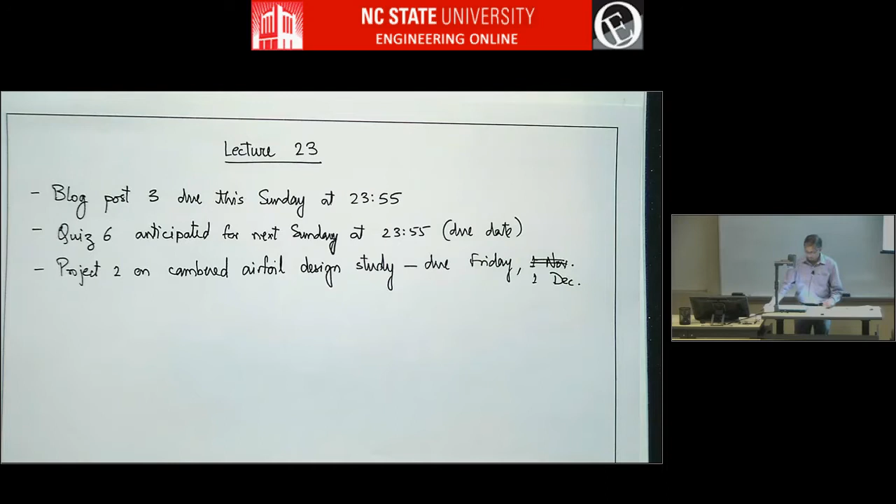Any questions? How was project 1? So it's very open-ended, right? There is no one way to do things or one correct answer, of course. So hopefully that was, and that's how real design is. Even at the end of it, you don't know if you've done it to the maximum possible extent or not. Okay.

Moving on. So in the last class, we were talking about the second elementary flow, which is a source or a sink. And this is radial flow everywhere. And this is the VR and V theta. So we'll continue from there and see what this looks like.

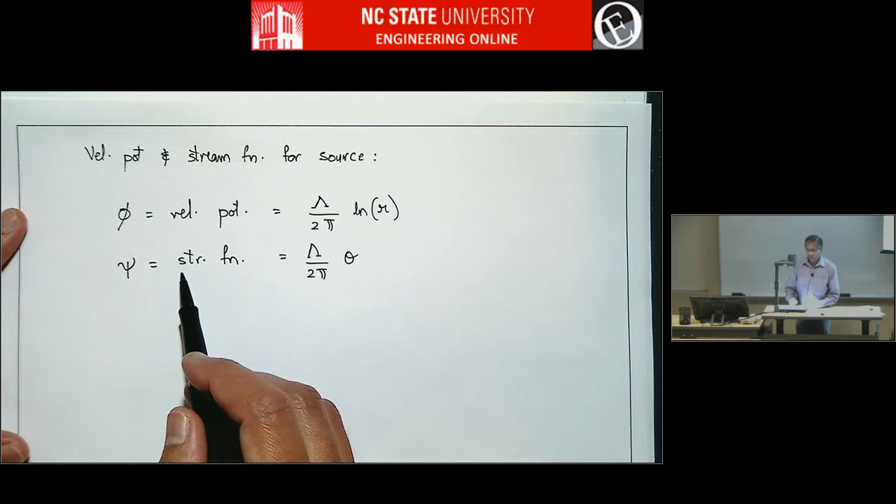And then we'll start adding some flows very soon. So strength, so velocity potential. Phi is velocity potential, and that is lambda over 2 pi natural logarithm of r, and psi equals stream function is lambda over 2 pi times theta. So you can see constant theta will be a radial line, and that's the stream function, or that will be a streamline, and constant r will be a circular contour, and that will be a constant velocity potential line.

And it turns out that volume flow rate out of the source, this will be per unit distance in Z, is simply lambda. So the source strength has got a physical significance.

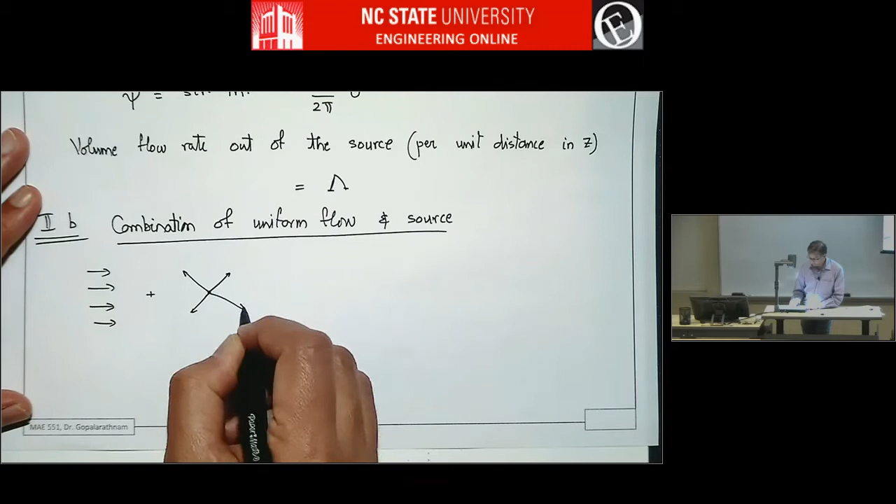Okay, so now we are going to combine the two flows that we have talked about, uniform flow and source. So flow 2B, number 2B is combination of uniform flow and source. So we have uniform flow as one elementary flow, and to that we are adding source, and we get a flow like this. Here's the source. If you just add the stream function due to uniform flow and source and draw constant values of the stream function, which will be streamlines, you get a flow like this.

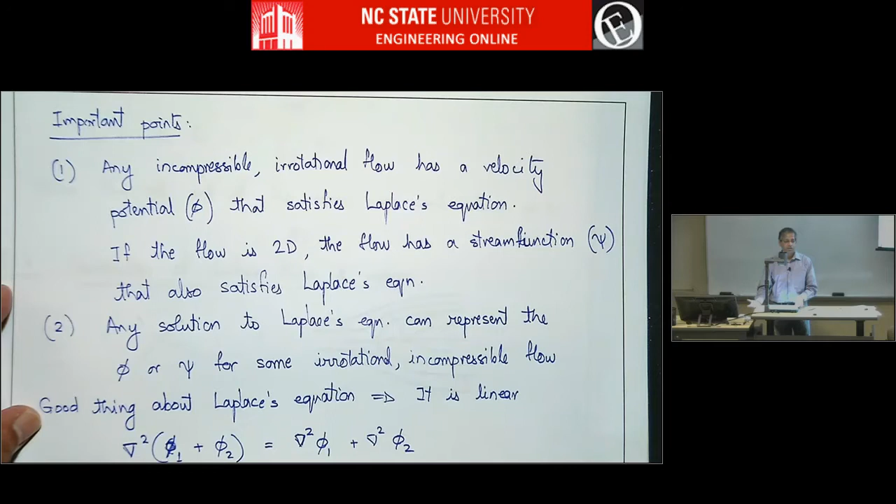Now remember, we talked about, last class we talked about two important points, right? Number 2 was any solution to Laplace's equation can represent the phi or psi for some irrotational incompressible flow. So we're going to draw on that and say the wall boundary condition is met by every streamline, right? Every streamline satisfies the same boundary conditions that are needed for a wall. So you can actually take this streamline and consider that as a wall and replace this as a solid body.

So this outside flow represents the flow past some kind of a parabolic nose body of infinite extent, it goes to infinity in the rear, but the nose of it is like a parabola or some sort of an elliptical shaped leading edge, let's say. So this represents the flow past a body like this. So one way to think about it sometimes is to say, if you want to focus on the leading edge flow of a symmetric airfoil, and if you zoom in and try to look at what the flow there looks like, this could be one possible model for that.

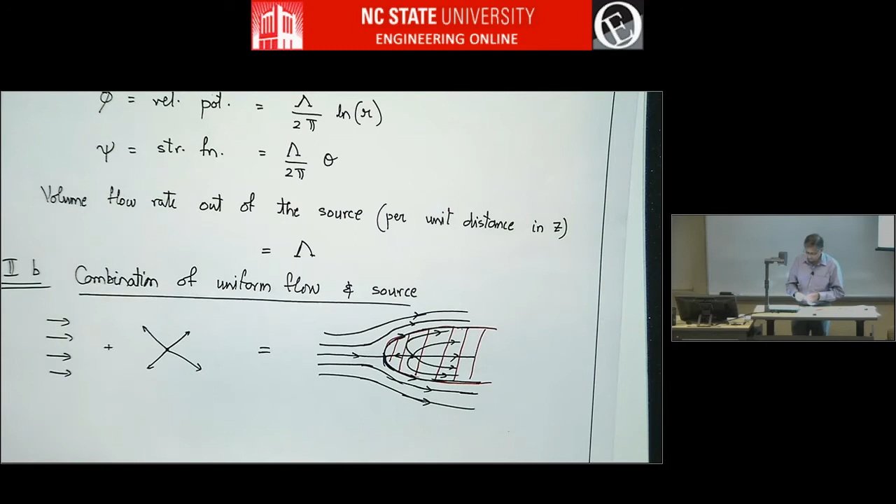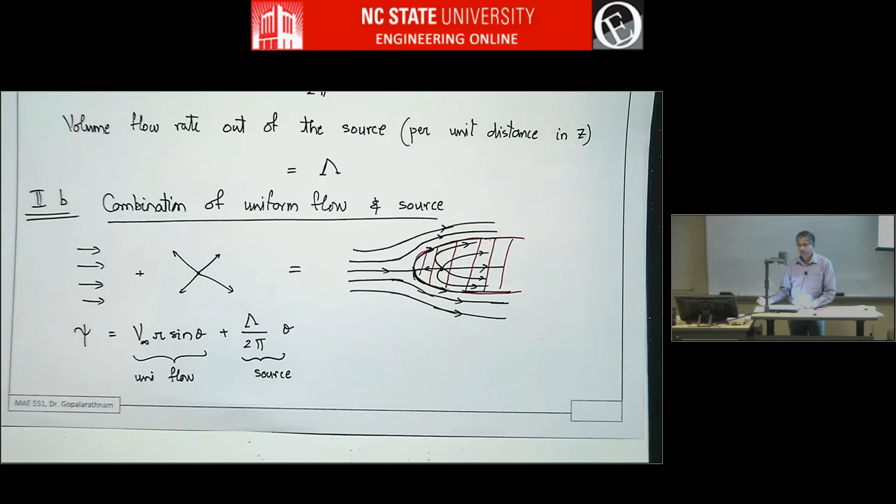So the stream function is V infinity r sine theta. So I'm converting, I believe this is y. V infinity y is the stream function for a uniform flow. Yeah, when we looked at it last time, stream function is u times y, right? If there is only a horizontal flow u, so that's u infinity y, and y in polar coordinates is r sine theta, plus lambda over 2 pi theta. So this is the uniform flow, and this is the source term. So we are adding up stream functions of two flows here because they both satisfy Laplace's equation, and that allows you to do such things.

Okay, let's do one more combination. Combination of source and another source.

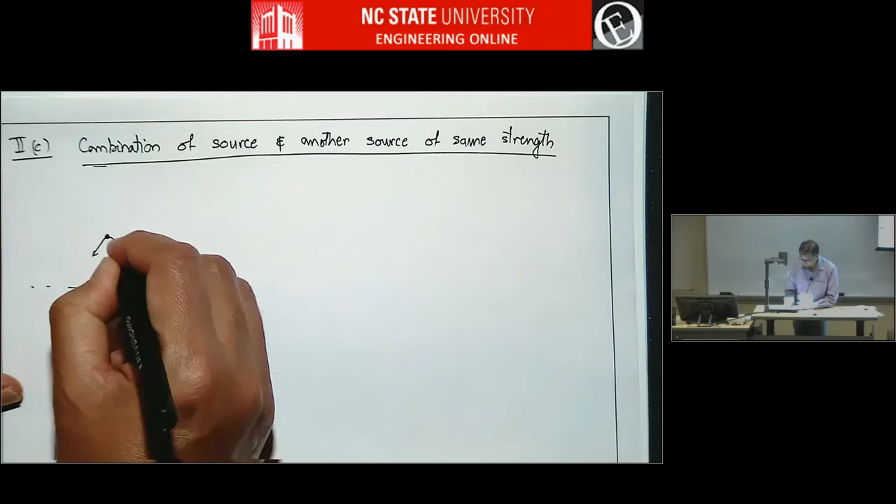So here we'll put a source here, and we'll put another source here. We'll add these two flows up. Any quick guesses on what we'll get? Yeah, this will actually become a streamline. So you'll have a streamline like this, and this source will create a flow that looks like this.

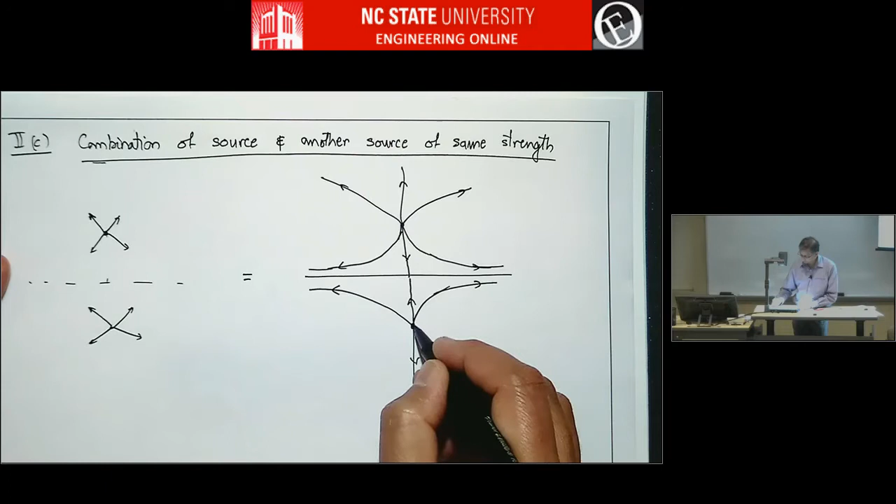One of the things you'll find is that the line bisecting the line joining the two sources, or the perpendicular line in between the two sources, becomes a streamline of the flow. And you can take any streamline and replace it with a wall, and the boundary conditions are satisfied. So you can take this part and convert it to a solid boundary. That means this other part you can convert to some sort of fictitious flow.

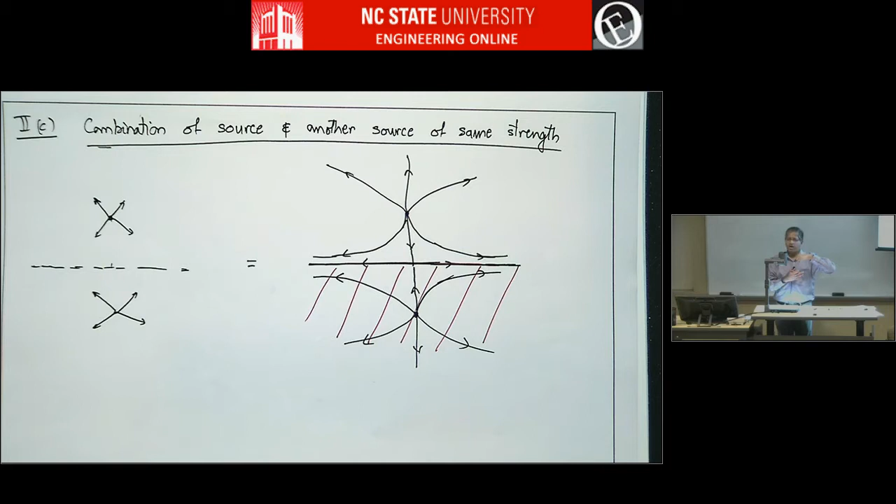So if you want to model the flow due to a source, but not a source in isolation, but a source near a wall, the way to model that is - it's hard to model a wall directly, right? How do you somehow figure out a wall? Instead, you can say a source near a wall is the same as a source with another source on the mirror side of the wall. And that resulting flow, if you discard the bottom half of it, is the flow due to a source near a wall. This general idea is actually really useful in so many places.

So this gives rise to the idea of the concept of a mirror image.

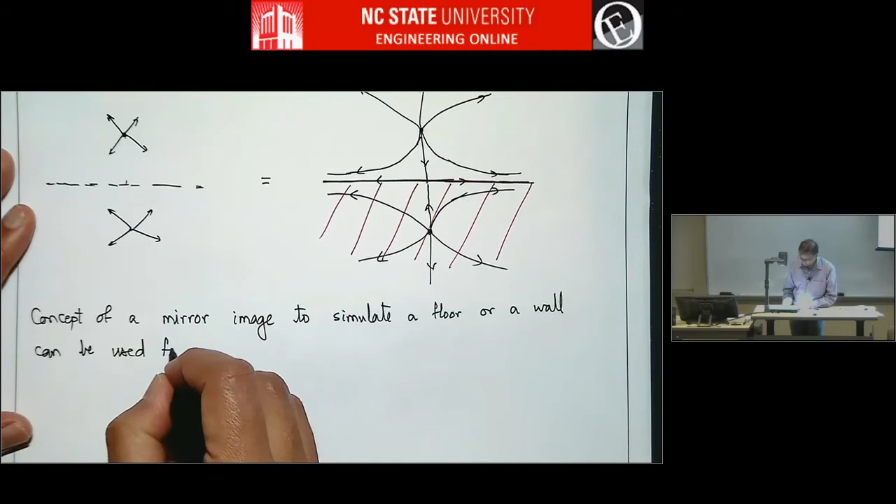Okay, so for example, sometimes airfoils operate very close to the ground. Can you think of an example where that happens? An airfoil that operates close to the ground. What's that? Takeoff or landing. Even more extreme - yeah, cars. The front wings of cars are actually so close to the ground that the ground plays a big influence. If you don't consider the ground, you're completely off on the aerodynamics.

So you might have a high lift airfoil that's like this. Now, how do you simulate the flow due to an airfoil near the ground? Because you can't ignore the ground, you'll be completely off. So one way to do that is to say, I won't simulate the ground. Instead, I will put a mirror airfoil under the ground. It'll be an exact mirror image like this, and I'll simulate the flow past two airfoils that look like this.

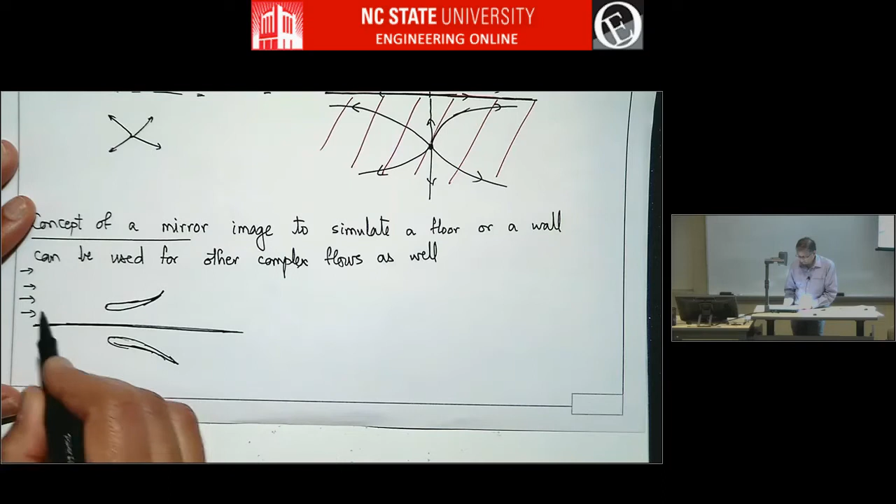In fact, you can do this even in wind tunnel testing. For some reason, if you want to simulate the flow for an airfoil near the floor, you can put it near the floor in a wind tunnel. But maybe for some unknown reason, if you don't want to do that, you could actually put two airfoils in mirror image formation, and the flow past the top airfoil is the flow past the wing or the airfoil near the ground. You can even do this all the way for an airplane.

So if you want to simulate an airplane in takeoff or landing, let's say you have an airplane like this. To simulate that, you can instead put a mirror image and do the analysis past two airplane bodies, and the top one will be the solution for the airplane near the ground.

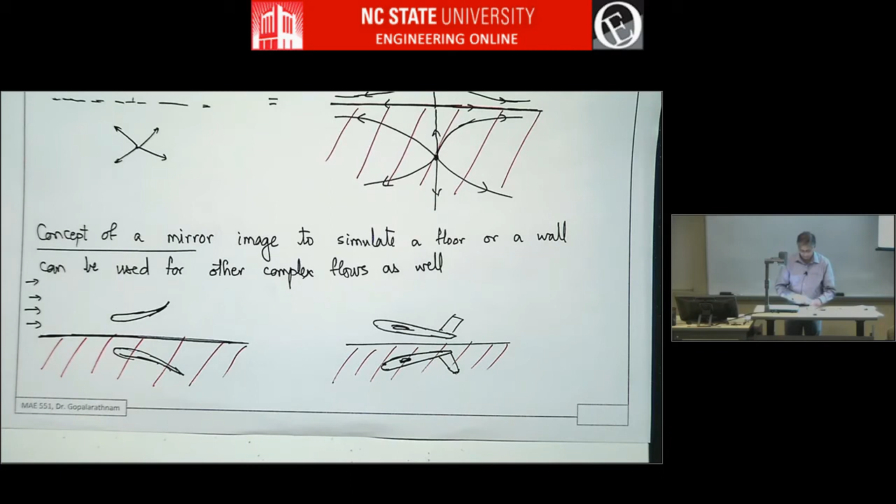Okay, let's do source plus sink. So you have a source and a sink placed close to each other, and the resulting flow will be - can you think of what it will look like? Not yet. Not quite an oval yet, or we're getting to that. But this will look more like a magnetic field due to a bar magnet. Yeah, it'll look like something like that. Maybe not perfectly like that, but it'll be similar.

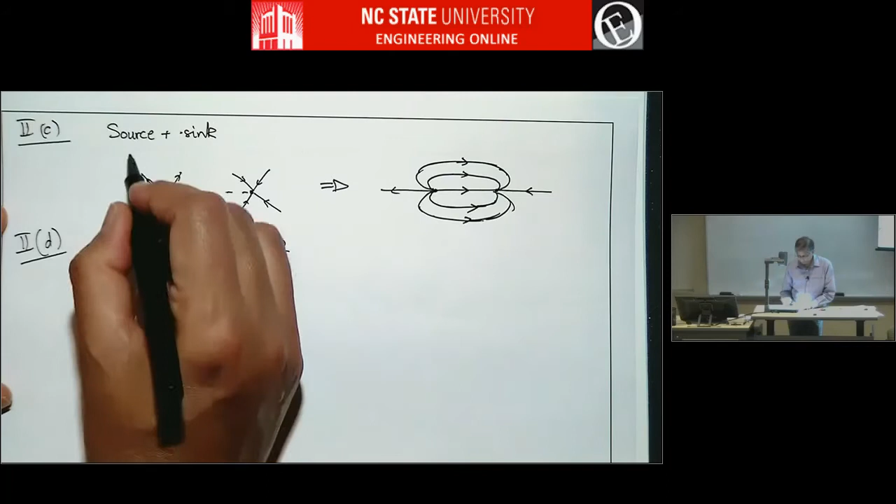Now we add free stream. So to this we add a free stream. There's a source, and there's a sink. And what does this give? Now it will give an oval, right?

So this doesn't tell us that this is flow past an oval. This is only saying these are the streamlines. What you then say is, I can take any streamline, especially a closed streamline, and it makes sense to make it a solid wall. That means if you take this streamline as the solid wall, you can ignore the flow inside. There's nothing wrong with the flow inside, except that we're ignoring it and saying, hey, this is the flow past this oval shape.

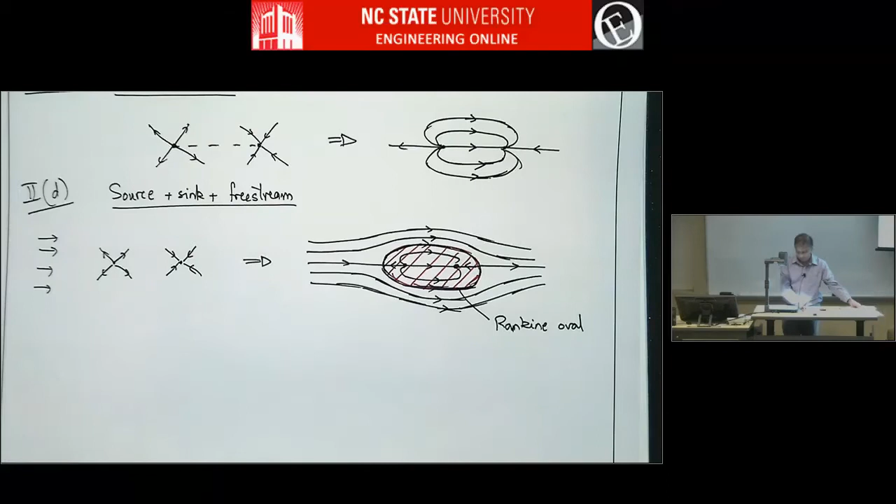Now we'll go to the third kind of flow, which is a doublet. Here we take a source and a sink.

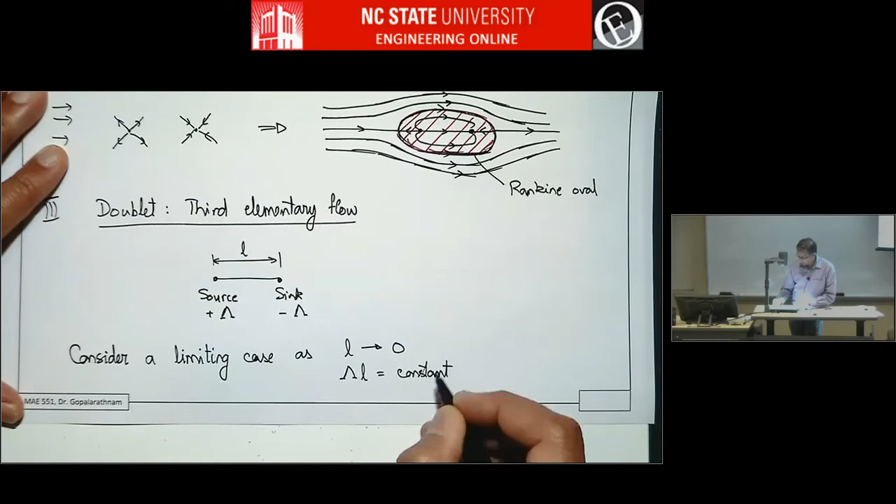And let's consider them at some distance L. But we are going to consider a limiting case, so we are going to bring these close to each other. So, limit as L goes towards 0, but in the process we want to keep lambda times L equal to a constant. So it's not like you bring them on top of each other and the source cancels the sink. It's more like you bring them closer and closer to each other while maintaining lambda L constant. And this constant is related to the doublet strength.

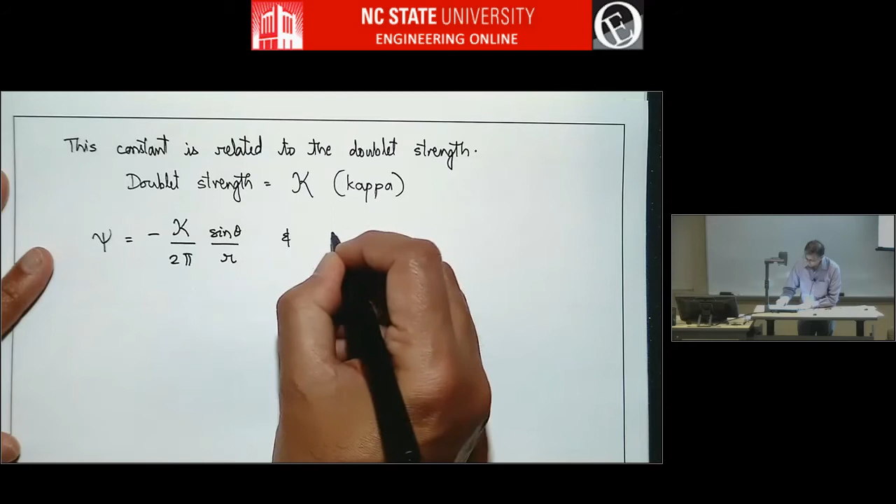So doublet strength is denoted by kappa. And the stream function due to a doublet is minus kappa over 2 pi, sine theta over r. And the velocity potential is kappa over 2 pi, cosine theta over r. So this is the stream function, and this is the velocity potential.

So you can take these functions and plot them in MATLAB or something. Just out of curiosity, go ahead and do it sometime, and you'll see all of these shapes we're talking about. The nice thing is you can add these functions up, make a contour plot in MATLAB. There are some tricks to it because these are singularities, right at the doublet things won't work, but outside everywhere it should work.

So the flow will look like this. Here is a doublet. The doublet has a direction, and so it has magnitude, which we've already seen, and a direction that points from sink to source.

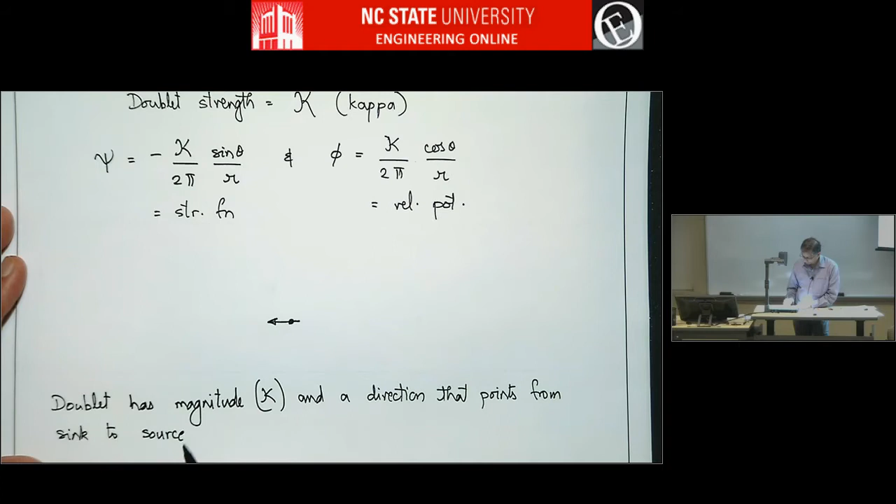So this is the direction of the doublet, and the streamlines—anybody want to guess? Sort of like the source and the sink, but forms a circle. Yeah, so it's like this, right? You're squishing these things and bringing them to one point. So did he say circle? Yeah, so they're going to be perfect circles like this.

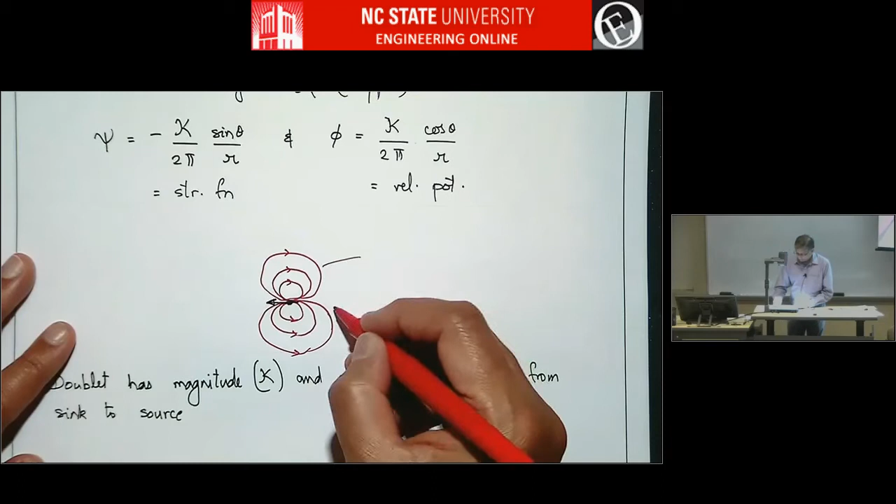Okay, now we'll add a doublet and a uniform flow. This is probably familiar, or should really ring a bell to many of you. So we have uniform flow like this, plus a doublet, which I'm denoting in this manner. What do we get?

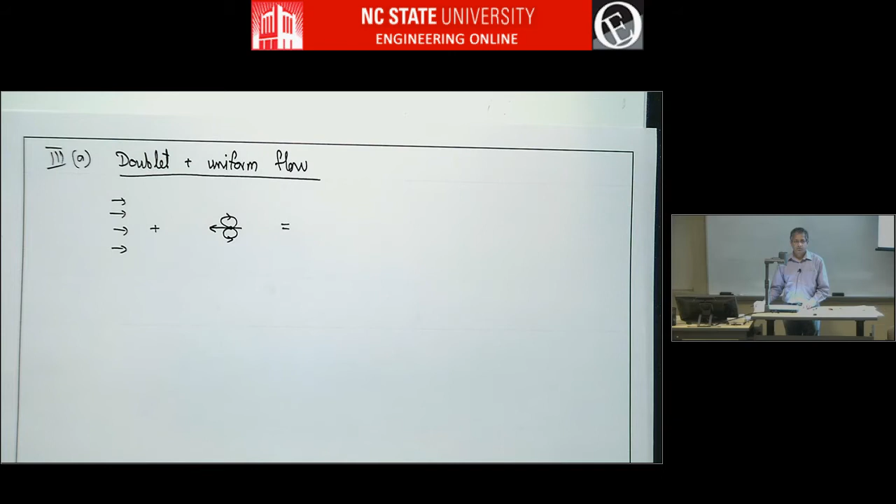Yeah, flow past a circular cylinder. So if you draw these streamlines, you can just add up this stream function, and you'll get: stream function is V infinity r sine theta minus kappa over 2 pi sine theta over r.

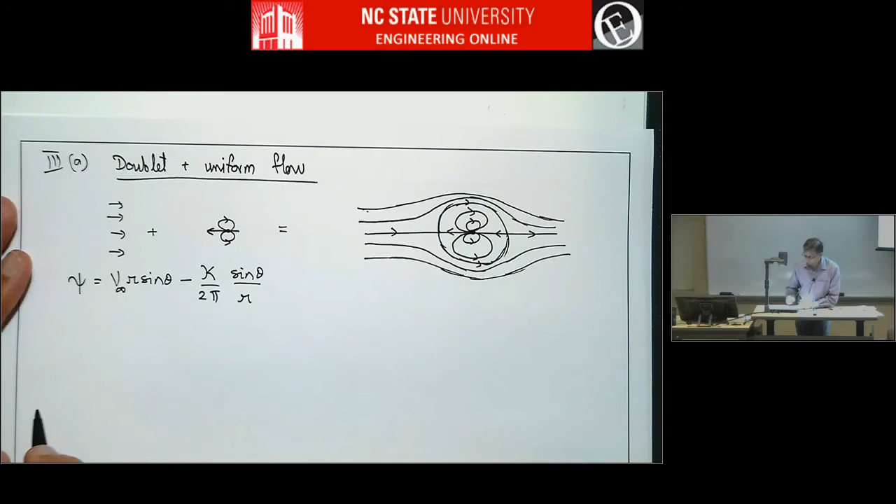So this is the set of contours of constant stream function. These are the streamlines, and as always we can take any contour—especially it makes sense to take a closed contour like this—and say, okay, let me replace that streamline with a solid wall. That means you can ignore the solution of the stream function plot inside this solid wall. It turns out that this is a circular cylinder, or circle shape.

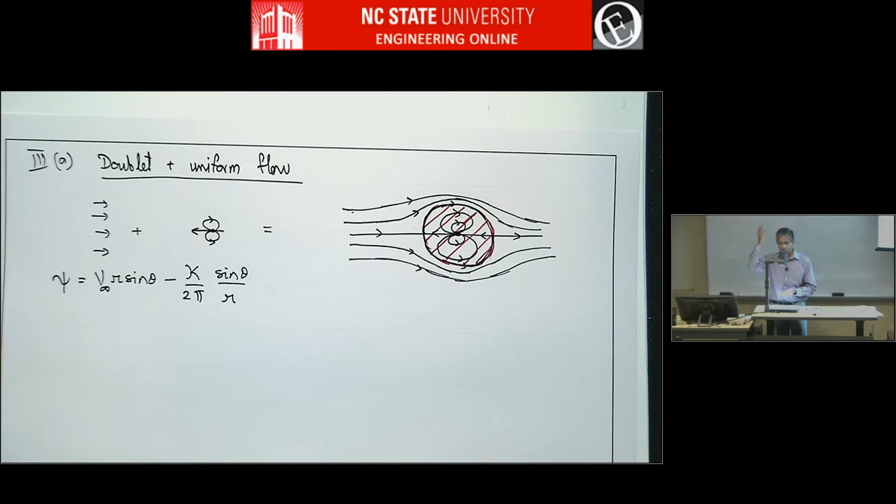So all of the cylinder—because it's a 2D flow, right—it goes to infinity inside the page and outside the page. So this is a cross section. And so this becomes the flow past a circular cylinder. So this is the potential flow.

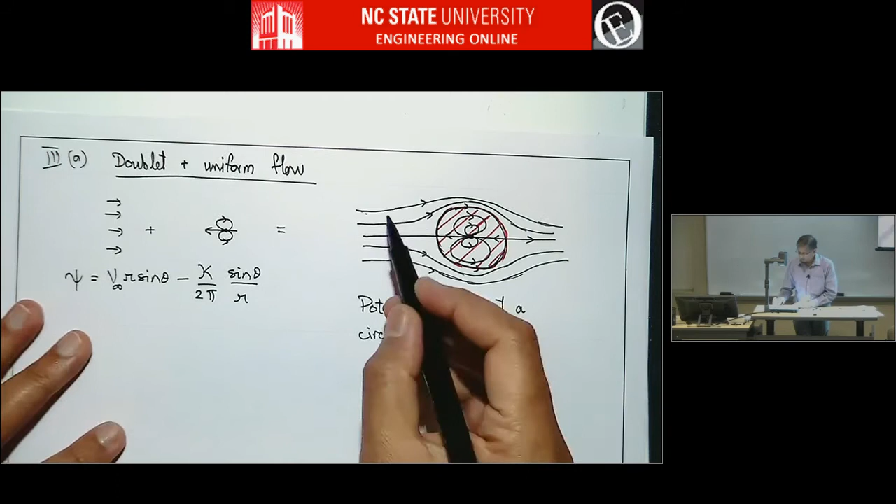And you can do other things too. For example, you could not only replace this as a wall, but even the horizontal surface, right? So if you want to simulate the flow past a bump, like a half semicircular cylinder with a wall, this top flow is the flow past a wall with a semicircular bump, something like that. Or you could say, let me replace one of these streamlines by a wall. So let's see how that looks.

So let me take that picture, and we said this flow is possible, right? You could also say, let me take a streamline like this, and let's replace that with a wall. So suppose you say that.

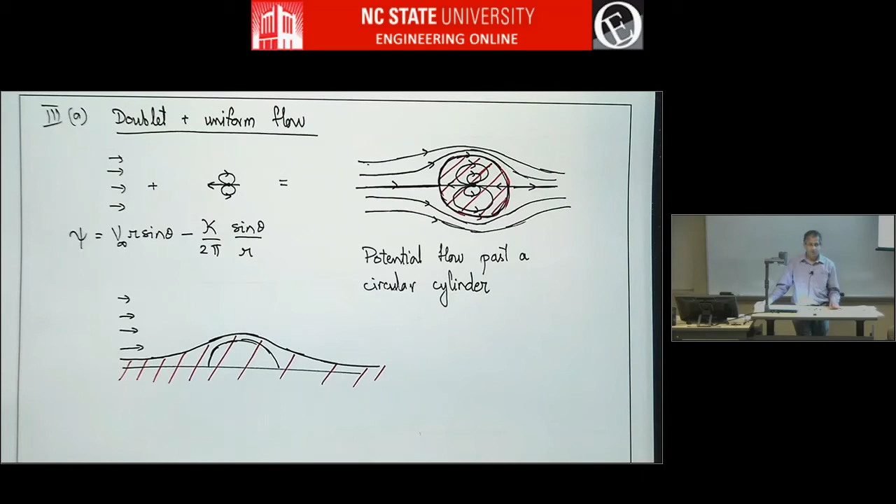This becomes a flow past some kind of a hill. You'll be constrained to this exact shape, but if you wanted to get a flow past a gentle hill, potential flow, this is not real flow, but still it's useful sometimes.

One of the things people have talked about this for is when you go flying sailplanes, people do something called ridge soaring. If you fly a sailplane near a hill on the upwind side, you get a wind pattern like this. So the wind goes up.

So if you fly a sailplane here, the updraft, depending on how big the hill is, will cancel out your glide slope and you'll actually fly level. So without an engine, you can fly level.

And if you have a long hill, if there's a big long mountain range, you can fly for thousands of kilometers along the mountain range without an engine, without losing altitude. People have done that, they've broken records and done all kinds of things.

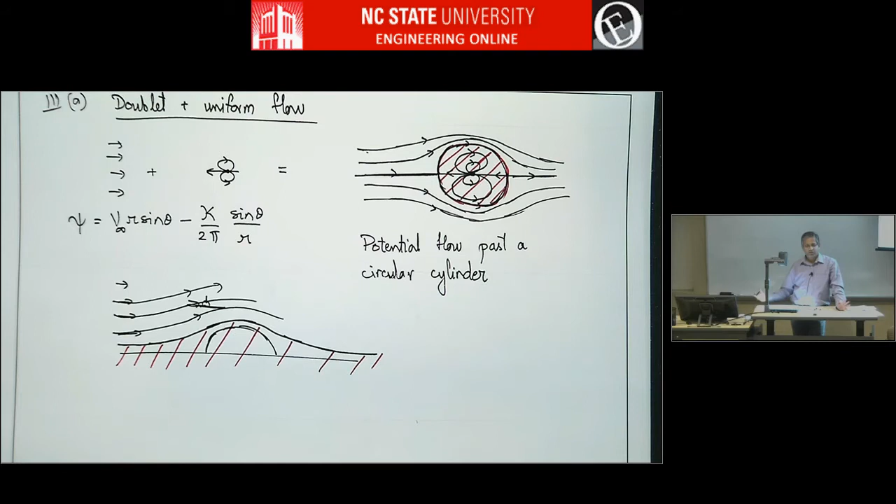So if you want a simple model of flow past some kind of a hill shape, this will give you that. One of the things this tells us is somewhere here is the zone for best updraft.

I guess the point is you can take any streamline, replace it, take that as a solid wall, and that gives you the flow past that wall.

So this is the flow past a cylinder, the solution that we use often. Radius of the cylinder is square root of... and I'm skipping a lot of steps which we do in the undergrad aero class. This is just a review of those concepts, and if you haven't done this in some course, you may want to go and read up the stuff.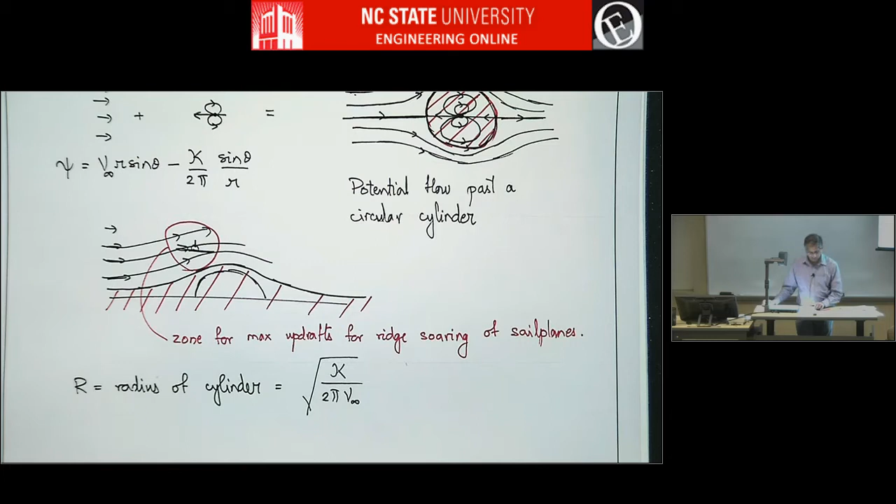The big thing to remember here is this is ideal flow or potential flow. So in potential flow, the cylinder... let's say this is ideal flow, and this is real flow.

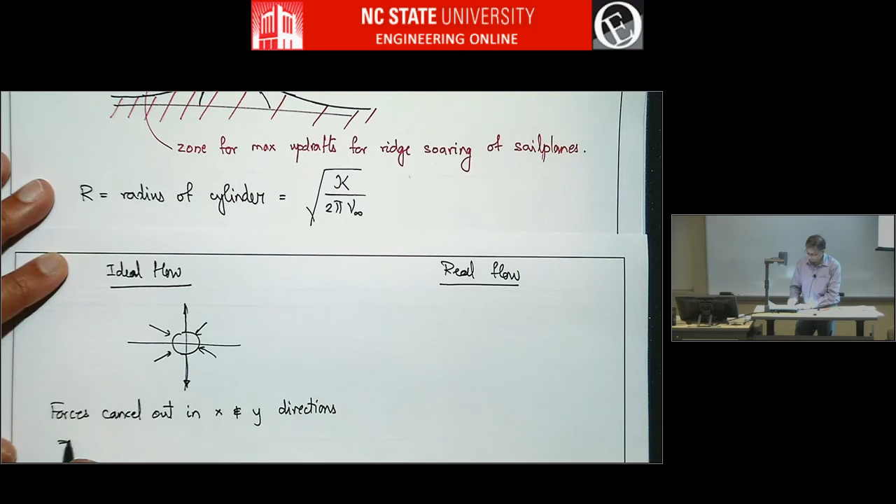You might have suction here. I'm not drawing this correctly, but basically the forces cancel out in x and y directions, which means there is no lift and no drag.

You can see even the flow is pretty symmetric, right? There's left-right symmetry and top-bottom symmetry. So there's going to be equal and opposite pressures everywhere, they'll cancel. But a real flow is not like this, a real flow will have separation.

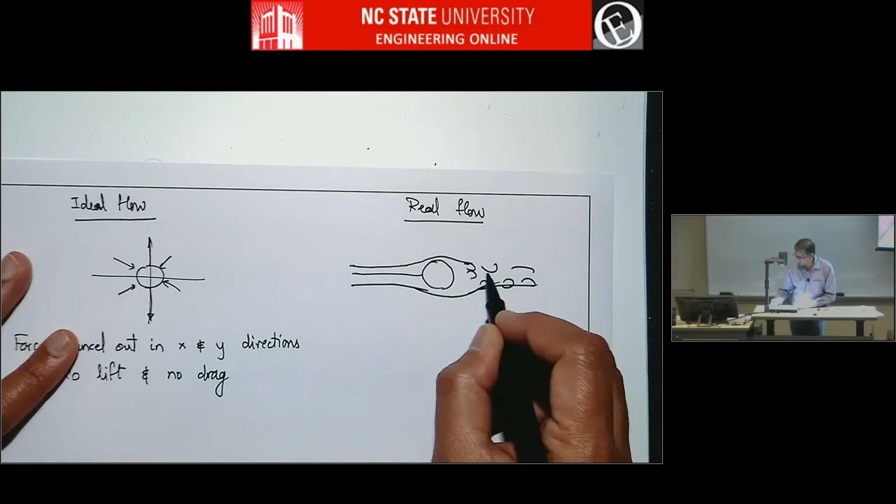Something of this sort, it depends on the Reynolds number. So you might have a wake where there's separated flow. Here lift may be 0, but separated flow results in significant drag.

What kind of drag will that be? Pressure drag. Because you will have positive pressure on the front surface, but lower pressure in the wake, and so there will be pressure drag.

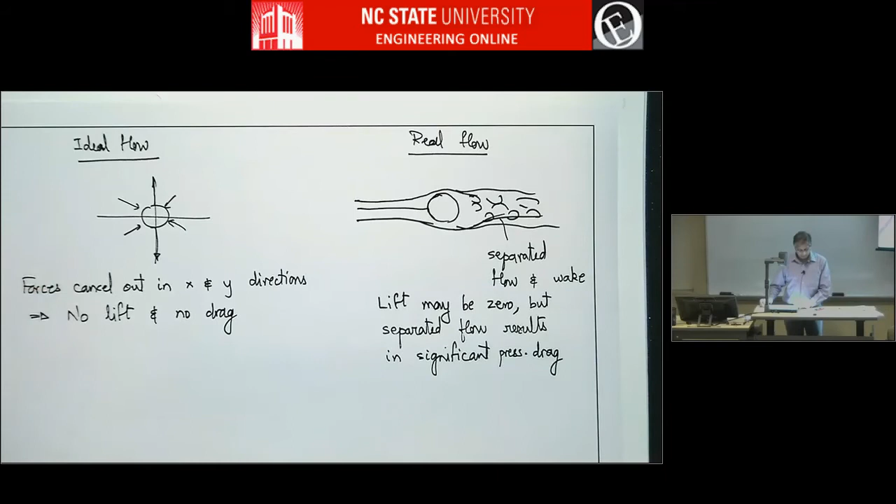And at many Reynolds numbers, there will be vortex shedding. In many cases, you'll have flow behind a cylinder, and many bluff bodies will look like this, with alternate shedding of vortices from the two sides. They'll keep flipping - this will come and then this will happen.

This is called a Kármán vortex street. It's named after Theodore von Kármán, who actually explained and discovered this phenomenon.

I think I put one book as a suggested reading in the syllabus, by Theodore von Kármán - 'Aerodynamics: Selected Topics in the Light of Their Historical Development.' He talks about this, it's very interesting reading. It's not at all heavy math and technical, it's a story basically, and he talks about how he came up with this.

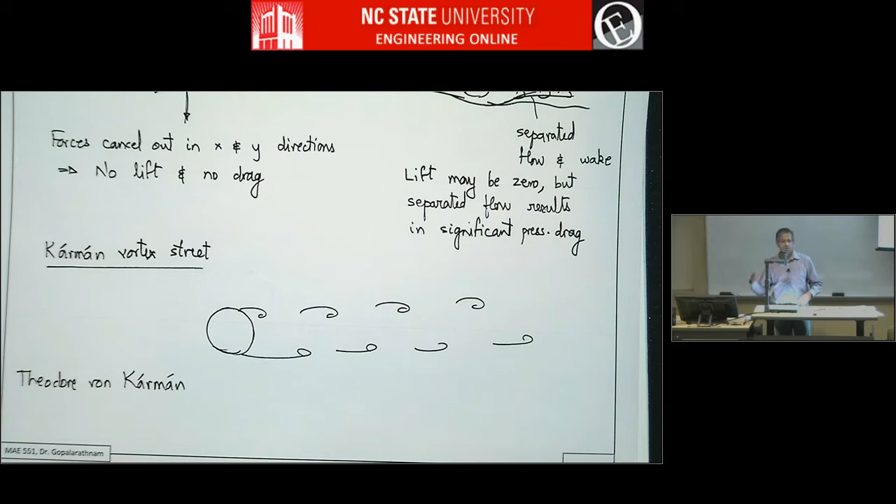This has also got a lot of practical applications, and one of the famous examples is the Tacoma Narrows Bridge, about which there's even a YouTube video. You can see how the bridge, under certain wind conditions, started oscillating so much that it just fell apart.

That's traced to vortex shedding. The other reason to study stuff like this - you can almost ask, what's the point, if the real flow is like this, that's what happens in reality. What's the point in studying flows like this? Maybe mathematicians will find it interesting. Why should we waste our time as engineers on some abstract concept like that?

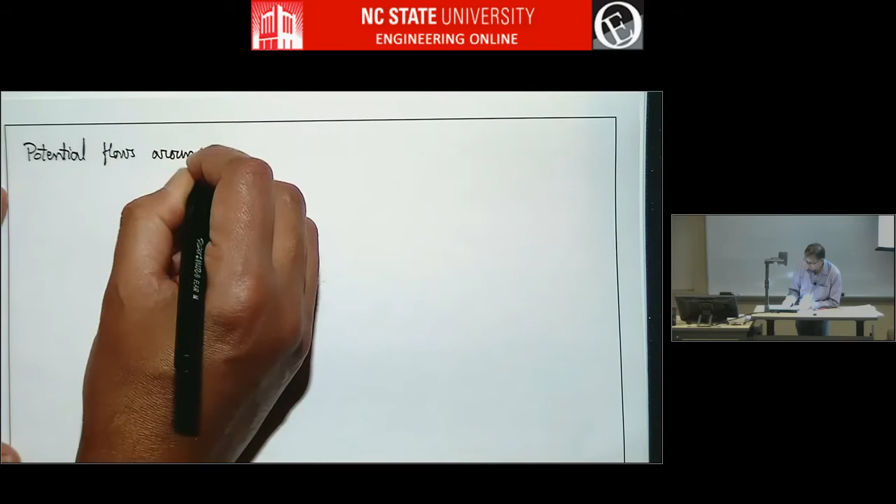One reason is that potential flows around cylinders, circular and even other kinds of cylinders, are useful in conformal mapping.

So in conformal mapping, what you do is you take flow around some kind of a cylinder, which is really well known. We have just written the equation for this. You can just add the stream function due to uniform flow and a doublet, and that's it. You get the streamlines due to flow around a cylinder, right? So you have this. This is potential flow, so it's not real flow.

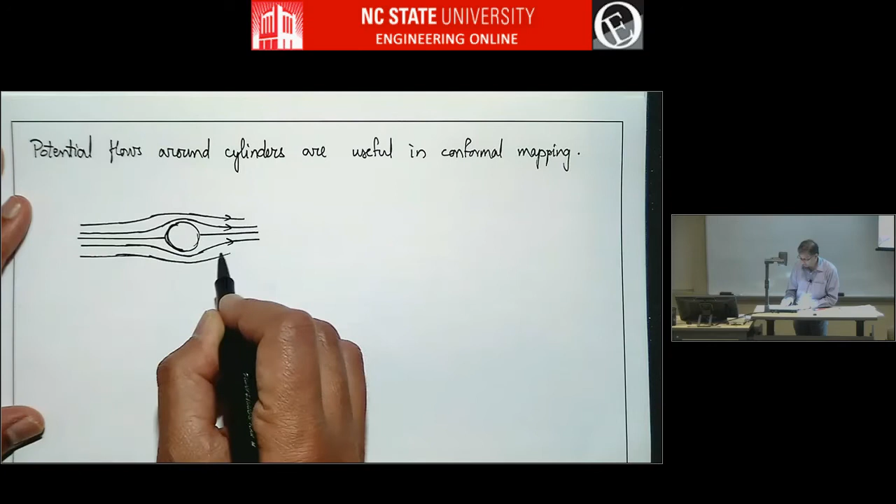And the isopotential lines will look like this. They'll always be perpendicular to the streamlines at every point of intersection.

So there is something called conformal mapping with which you can transform this. And when you transform it, you can transform it to an airfoil shape. And that's just kind of mind-blowing.

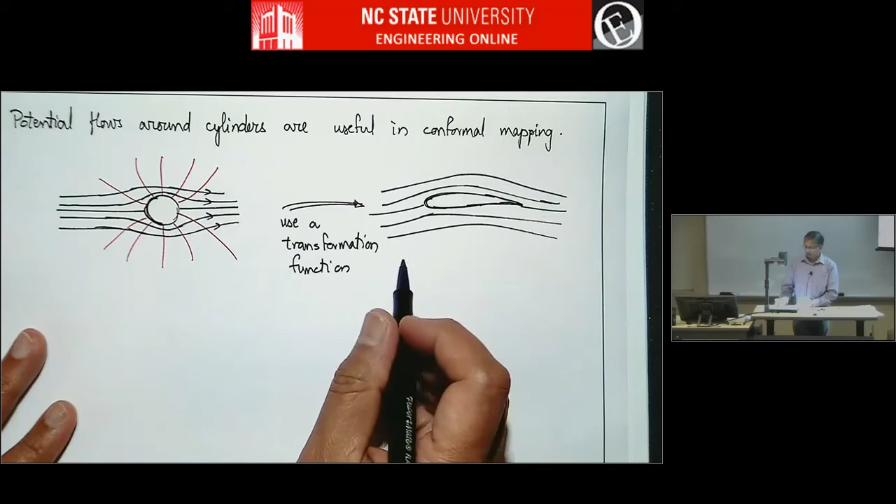So you can convert this flow by using a transformation function using complex variables, and this very well-known flow can be transformed to flow past some really complicated looking airfoil shape like this. Think of it, this is a really weird shape, right? Nothing regular about it. I mean, we are so used to airfoils that we say, okay, that's a nice shape. But if somebody in the very beginning, 200 years back, wanted to calculate flow past this, nobody knew how to do that.

And then they came up with conformal mapping, and we'll be talking a little bit about that in the Joukowsky transformation. I mean, the way the semester is going, I'm very much behind, but hopefully that'll happen.

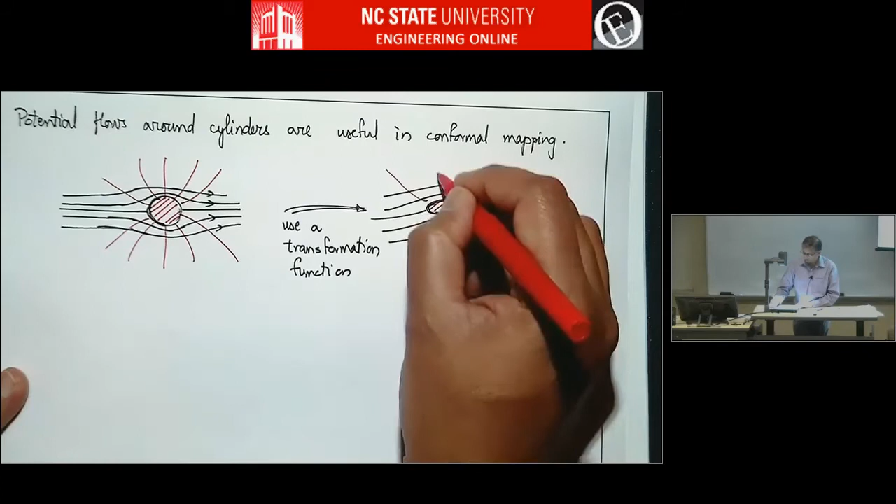So what happens is all of these streamlines get morphed into streamlines like this because of the transformation function, and this geometry gets morphed into this geometry, and the isopotential lines will become something like this. I don't know exactly how they'll look, but maybe something like this. So that's a really good reason to actually study these kind of flows, even though they are very different from real flows.

The reason potential flow past these kind of bodies is useful is why? Okay, at least we can say this potential flow is nothing like reality because there's a big wake. But this potential flow is actually very useful. It's close to reality, but what? Yeah, these are streamlined objects.

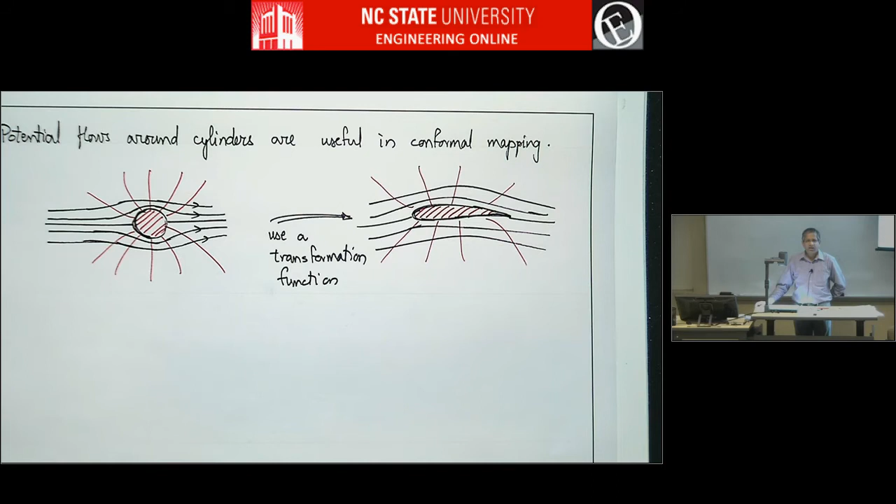For streamlined objects, as long as angle of attack is small, the boundary layer is thin and attached most of the time all the way to the trailing edge. And so the potential flow is actually very close to the real flow. And lift and pitching moment, at least you can get very confidently, even with angle of attack up to 10 degrees or something. It's only drag, of course, potential flow has no drag. So for drag you have to do a boundary layer calculation.

Okay, pressing on. Fourth elementary flow is a vortex.

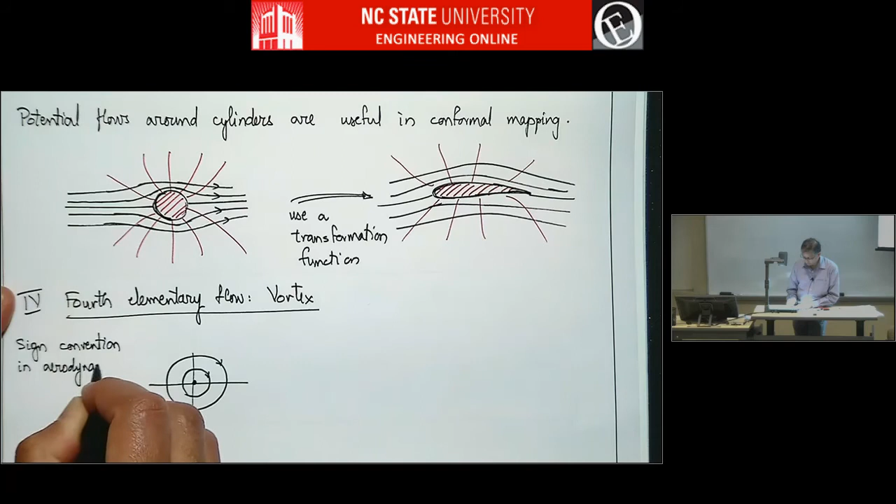So a vortex is a flow where the streamlines are circular, concentric circles. And the sign convention in aerodynamics: a positive vortex results in clockwise flow. And this is kind of counterintuitive because usually theta, in polar coordinates, increases this way, right? But this is somehow the way things are, at least in modern books like Anderson's books.

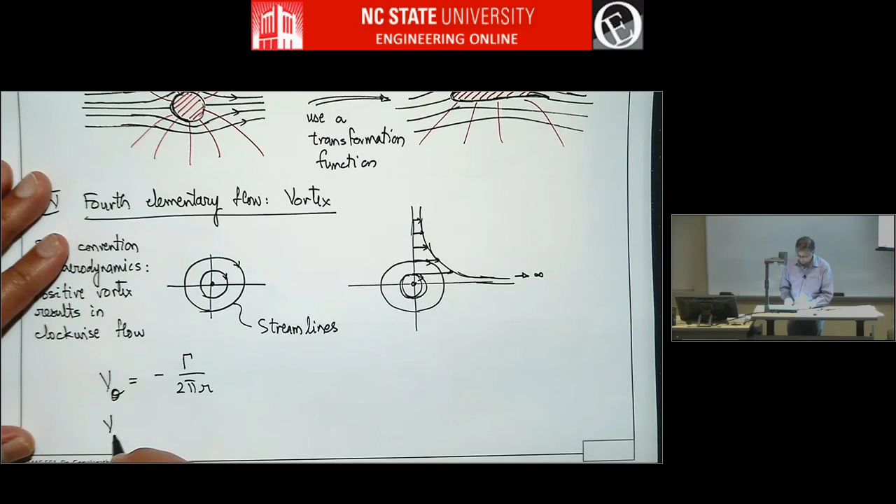So the velocity variation - there's only tangential velocity and that varies in a certain way. So as you go up in y or in r, velocity decreases. And as you come closer and closer to the vortex, velocity becomes very high and actually goes to infinity. So in other words, these are the streamlines. So v theta equals minus gamma over 2 pi r, and Vr equals 0. So there is no radial velocity.

So the strength of the vortex is denoted by gamma, which is capital gamma.

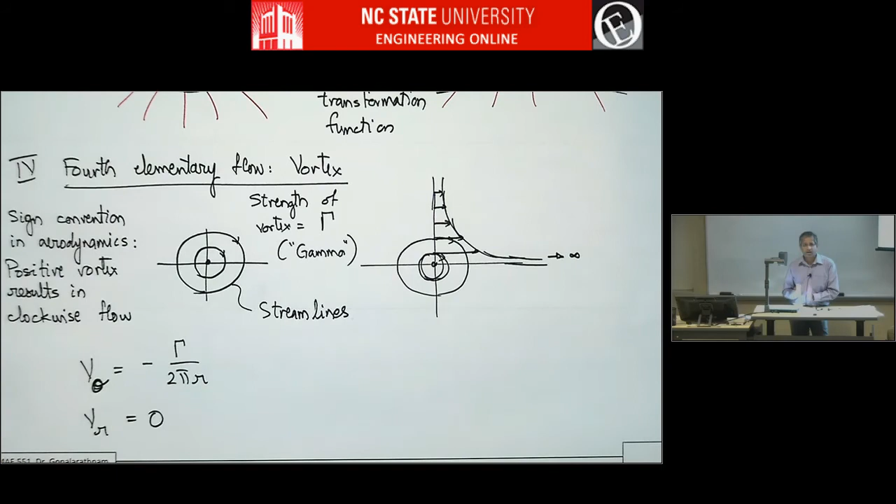How do you think the isopotential lines will look for a vortex? Yeah, it'll be radial, because everywhere isopotential lines have to intersect streamlines in a perpendicular fashion, right? So these are isopotential lines. So velocity potential is given by minus gamma over 2 pi times theta, and the stream function is given by gamma over 2 pi natural logarithm of r.

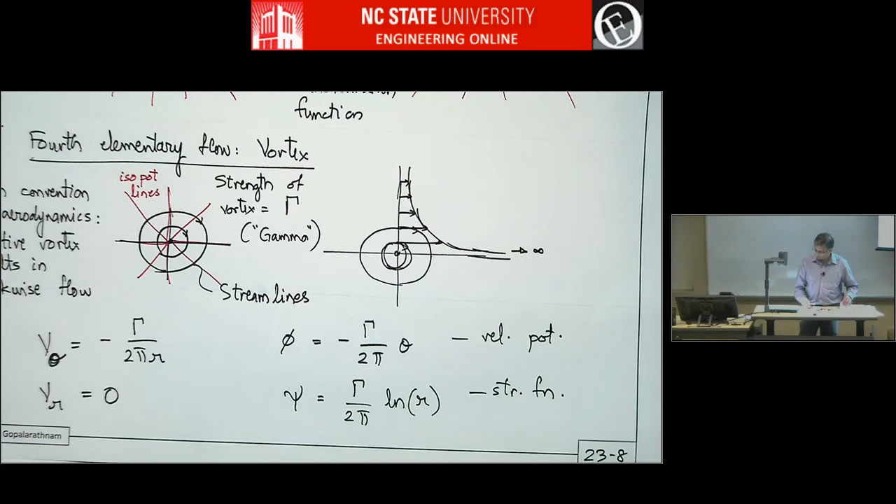And in a vortex, curl of V - remember curl V has to be 0 for irrotational flow, right? Potential flow is irrotational, incompressible. So curl V is 0 everywhere except at the vortex point, and usually you put that at the origin. So except at the vortex point, this vortex point is a singularity. Just like in a source, conservation of mass works everywhere except at the source, right? So that point is a singularity. Like that, a vortex is also a singularity, and here curl V will not be 0. Everywhere else it will be 0.

Okay, so this actually brings us to the concept of circulation.

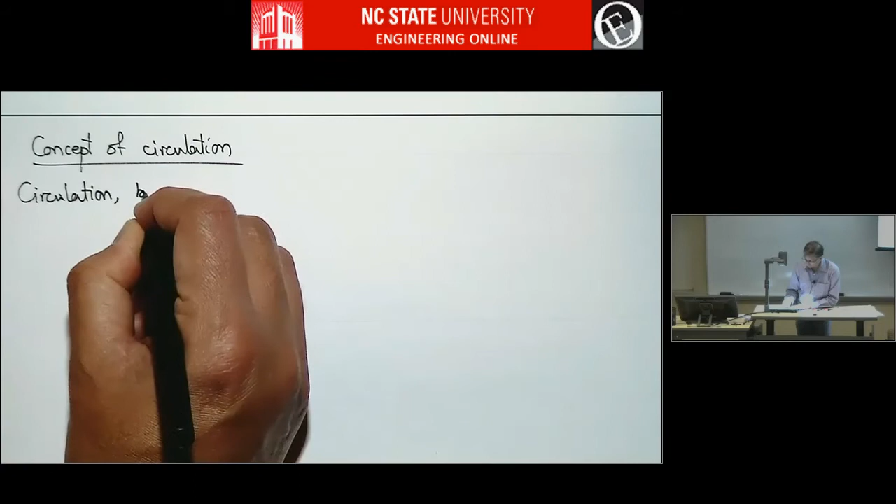So circulation is the line integral. By definition, it's the line integral of the velocity field around a closed contour. This is a definition, so we just take it as they have defined it. In mathematical terms, this is integral v dot dl around a closed contour.

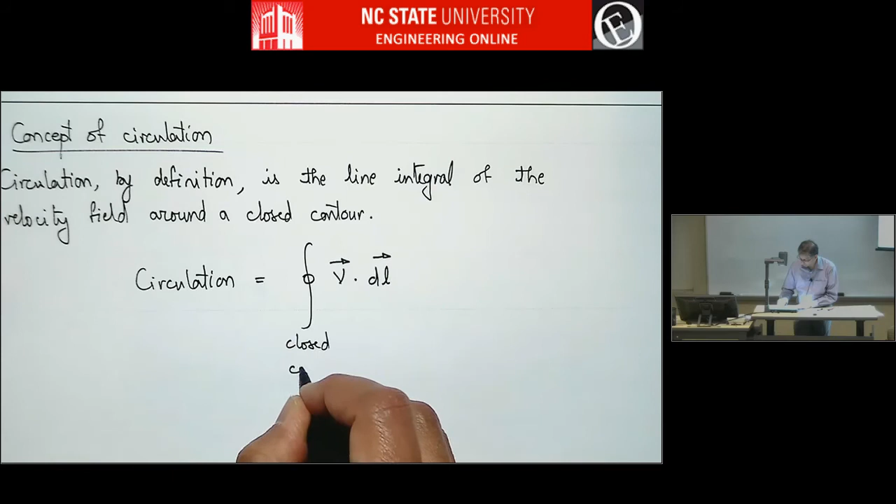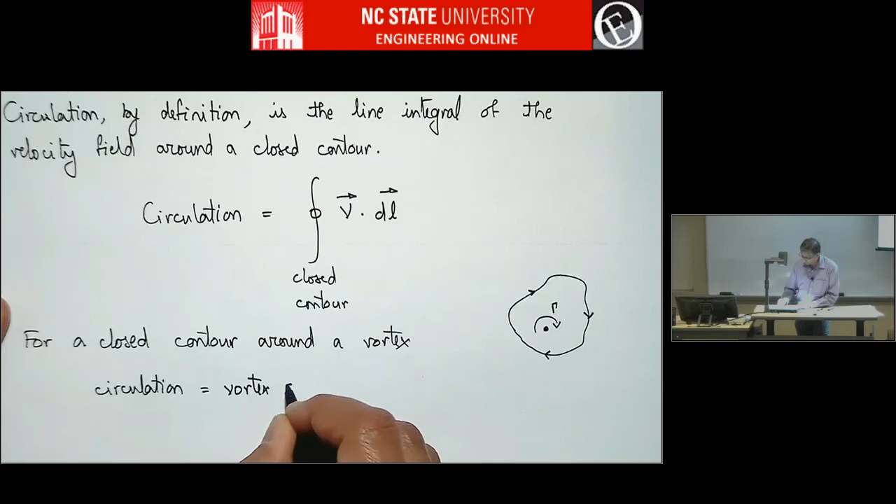So for a closed contour around a vortex, let's say you have a vortex here of strength gamma, and you make a contour like this. Let's say you go in the clockwise direction. What do you think you'll get for circulation? It'll be equal to the vortex strength. So the circulation is equal to the vortex strength, and that's equal to gamma.

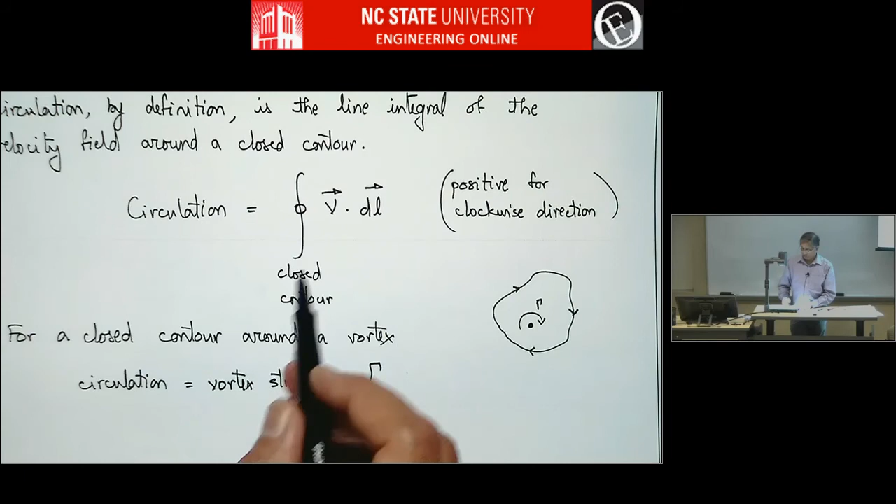I should mention that circulation is positive for clockwise direction. That means you do the line integral in the clockwise direction. Again, this is opposite to what you do in math, where you do positive polar coordinates, which is counterclockwise. So because circulation, which is a completely mathematical definition, is integral v dot dl around a closed contour, that turns out to be equal to vortex strength. So gamma is also the symbol that's used for circulation.

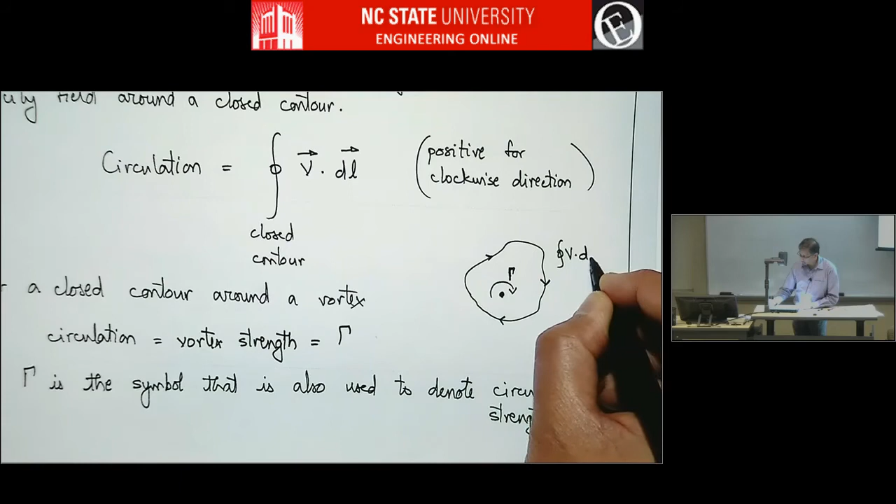So the circulation strength is denoted by the symbol gamma, same symbol used for a vortex. Some nice consequences or connections between circulation and vortex strength: if you take a contour around a single vortex of strength gamma, integral v dot dl equals gamma. If you have a bunch of vortices, say gamma 1, gamma 2, and gamma 3, and you take a contour around these three vortices, then integral v dot dl around this contour will just be the sum of these vortices, gamma 1 plus gamma 2 plus gamma 3. That just comes from the math working out that way.

We are very soon going to connect all this with airfoil flows. Now we'll go and add to the cylinder flow we got earlier, and we'll put a vortex on top of that. So this will become lifting flow past a circular cylinder. Here you have uniform flow plus a doublet, which we had earlier, plus now we'll add a vortex at the same place where the doublet is, and we'll get lifting flow past a circular cylinder.

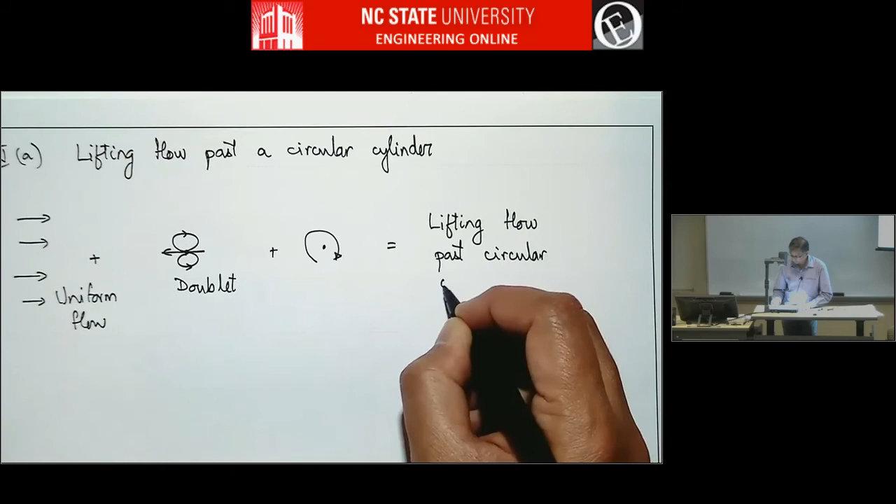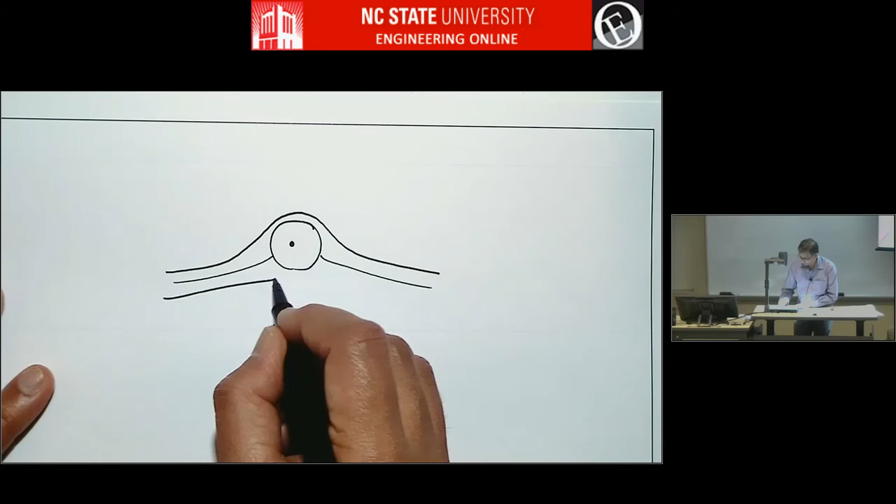So let's say we put the doublet here and the vortex here. You will get a flow whose streamlines are like... let me use a new page. So we have V infinity far away, and this point has a doublet and a vortex, and then you get some flow inside too. If you draw the streamlines inside, I think it'll be something like this. But essentially you're saying this cylinder is a streamline. The circle is a streamline, so you can replace the circle with a wall, and that means the outside flow is the flow past a circular cylinder, but a flow that generates lift because of the asymmetry in the flow.

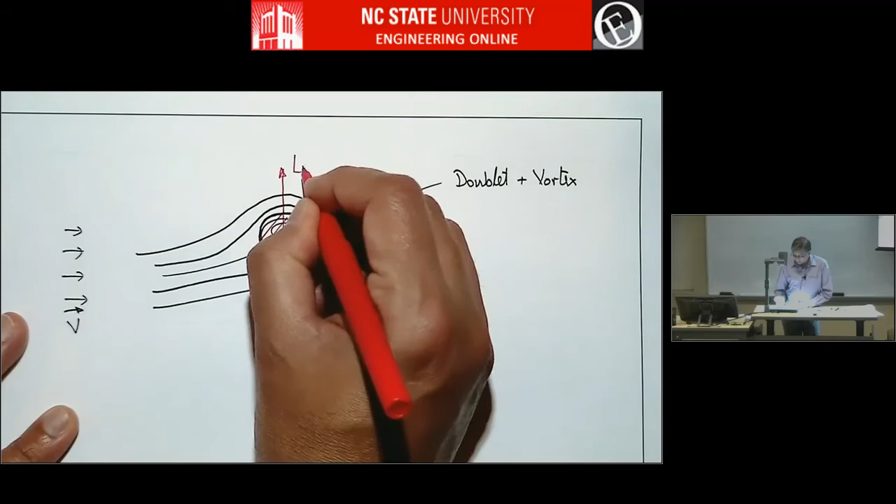So now you have a cylinder that's generating lift. How you get this in practical life is maybe of secondary importance. It turns out if you put a cylinder in a wind tunnel and spin it, you will get lift. But that's not exactly the same kind of flow as this - that comes due to viscous effects, because if the cylinder is spinning, the surface friction will also cause the flow to go faster on the upper surface than on the lower surface, kind of like this. So that comes due to viscous effects, whereas this is completely potential flow. But the same general idea is what happens when you spin a cylinder in a real flow, like in a wind tunnel or water tunnel. So this has got non-zero lift, but zero drag.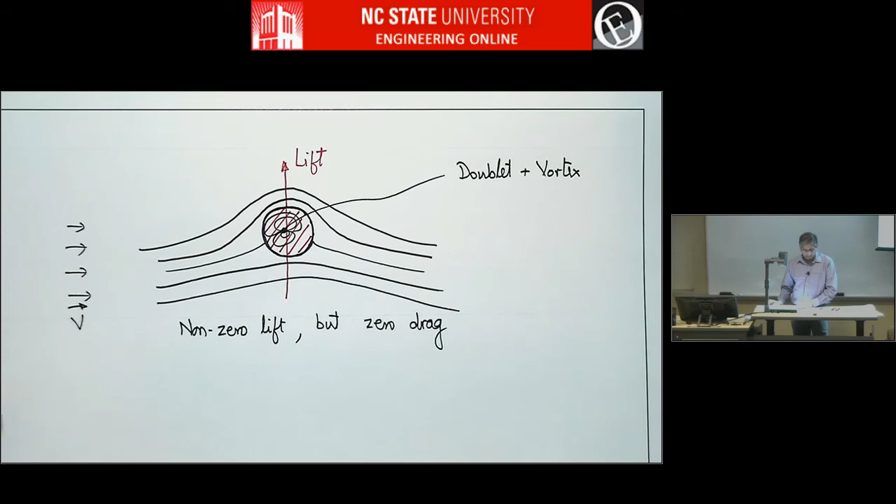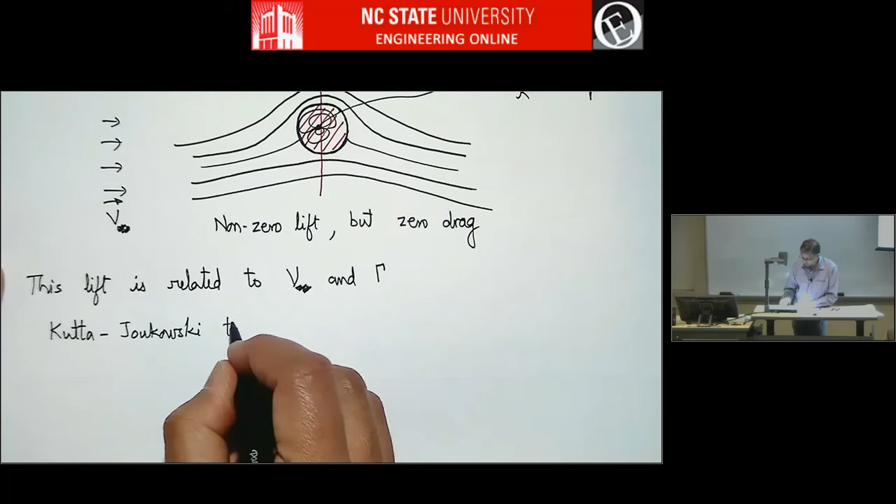The doublet strength is kappa and the vortex strength is gamma. Doublet strength controls the radius of the cylinder, and gamma, the circulation or vortex strength, controls the lift. Without going into too much derivation, this lift we generate is related to V infinity, the free stream speed, and gamma. Let's just call it V for now. Lift is related to V and gamma, and there's a theorem that connects all this, called the Kutta-Joukowski theorem, which states that lift per unit span is rho V cross gamma. This V is the uniform velocity and gamma is the vortex strength. If you take those as vectors, V is in this direction, gamma is into the page, and V cross gamma gives you lift in this direction. This is lift per unit span - again, we are talking about 2D flows.

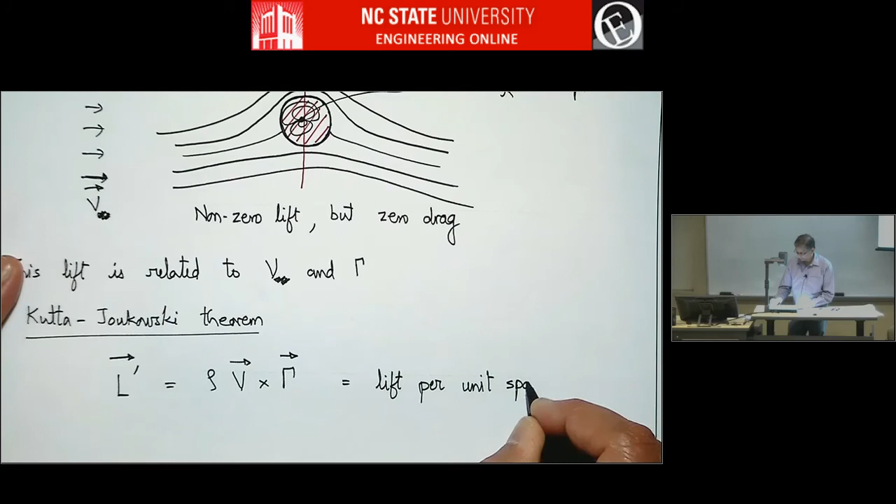So we see that L prime is perpendicular to V. Here we can simply write L equals rho V gamma in this particular case, because V cross gamma is just V times gamma. Okay, so let's look at the flow past a cylinder for different values of gamma.

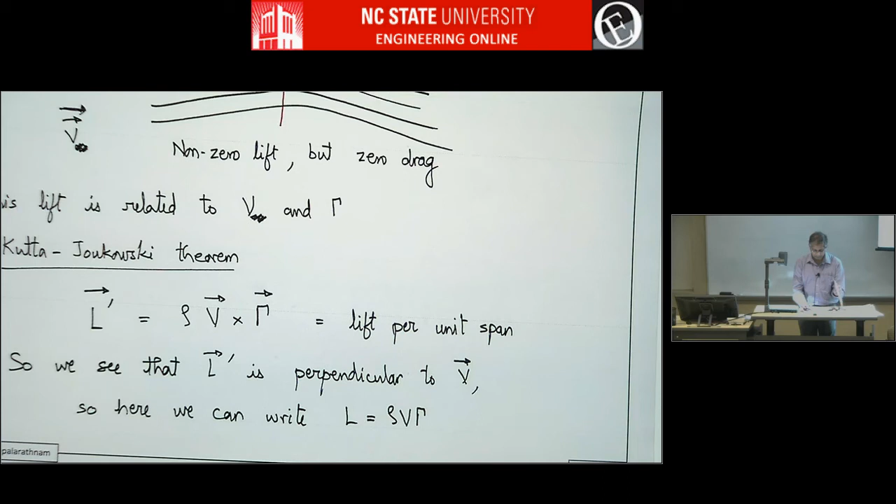So let's put first gamma equals 0. When gamma equals 0, it's just flow past a circular cylinder with 0 lift, right? So you get symmetric flow and no lift. There's no vortex here, it's just a doublet and uniform flow and doublet. This is what we looked at some time back.

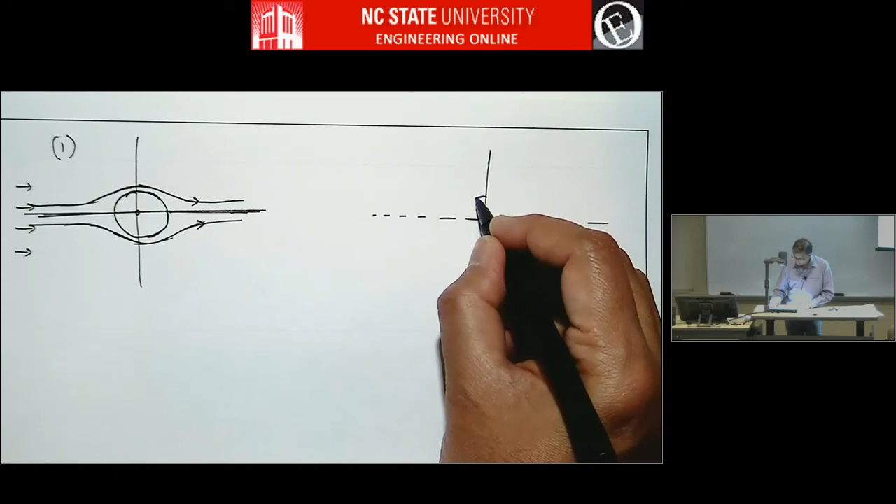Now you add a little bit of gamma. So from here, let's call this 1. Now we add a little bit of gamma, and we'll take the same cylinder. I'll try to draw it as much as possible the same as before.

So gamma here is such that gamma over 4 pi V infinity is less than r, where r is the radius of the cylinder. So if you put a small amount of gamma, you get a flow like this. So the stagnation streamlines might be here.

So initially in this flow, the stagnation streamlines are on the x-axis. When you put a small amount of circulation, the stagnation streamlines come here, and there's a certain amount of lift. This is number 2.

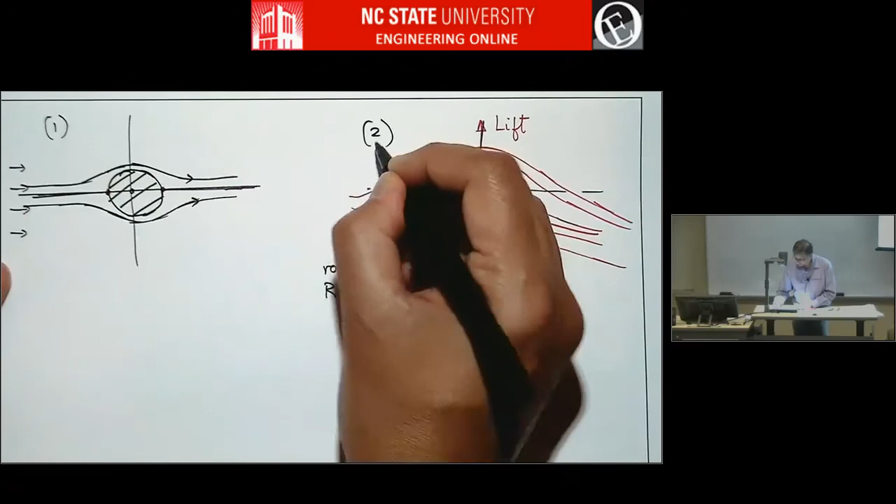So now let's increase the circulation until these two stagnation points come to the bottom here. This will correspond to gamma over 4 pi V infinity equals R. So when you come to this value of gamma, when you keep increasing gamma till it's 4 pi V infinity R, the stagnation points will coincide. If you go beyond this, the stagnation point will actually go off the surface.

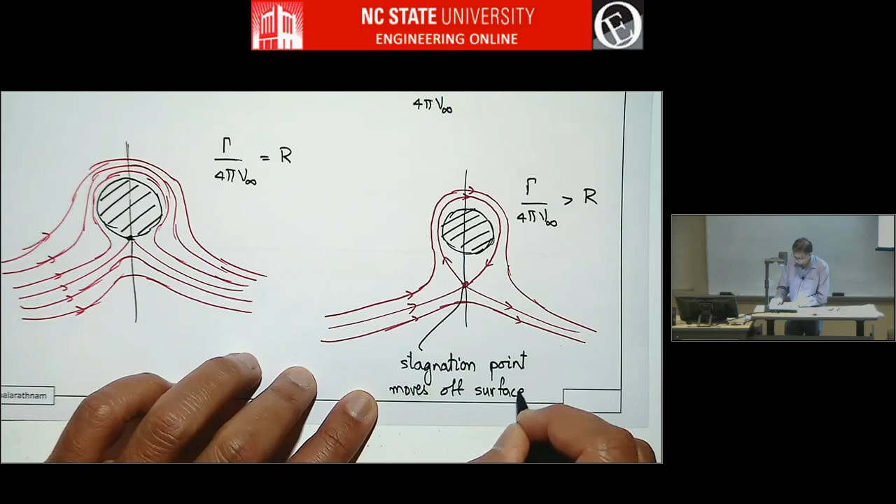It's kind of interesting. I'm not super sure what practical application this has, but it's just interesting to see as a fluid mechanics solution. I think when you use conformal mapping to transform these flows, they become successively higher cambered airfoils, so there's probably some kind of limiting value of the camber beyond which you probably can't transform it to a realistic airfoil shape.

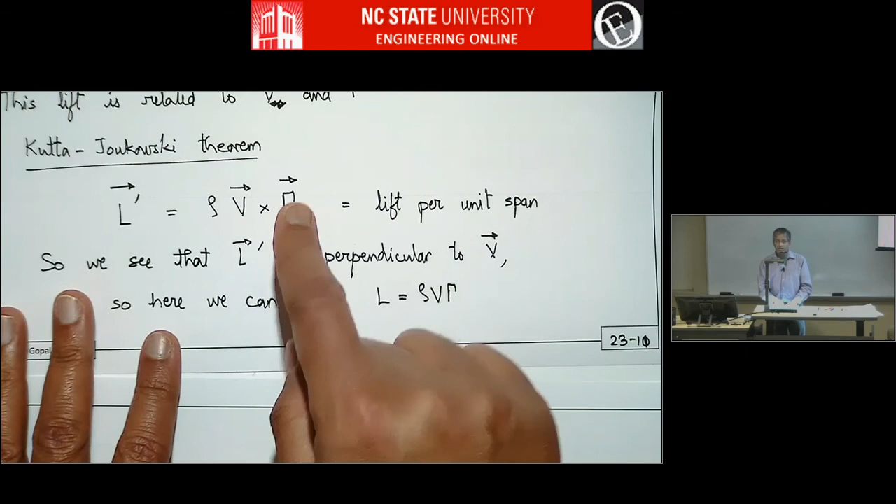So this Kutta-Joukowski theorem that we talked about here, this is valid for lift equals rho V gamma. This is valid not only for a circular cylinder, it's also valid for airfoils or any body. I'm going to write it in short as KJ theorem, which states that L prime equals rho V cross gamma. This theorem is valid even for other shapes.

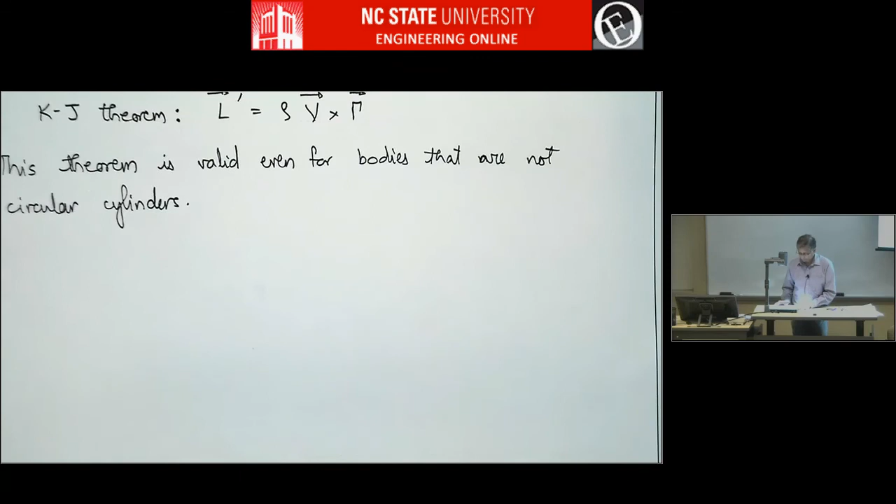So when we go to airfoils, we're going to see this soon: when you look at the solution for lifting flow past an airfoil, let's say the lift per unit span for this airfoil equals L prime. And then let's say V infinity is the free stream velocity, so that's the uniform flow.

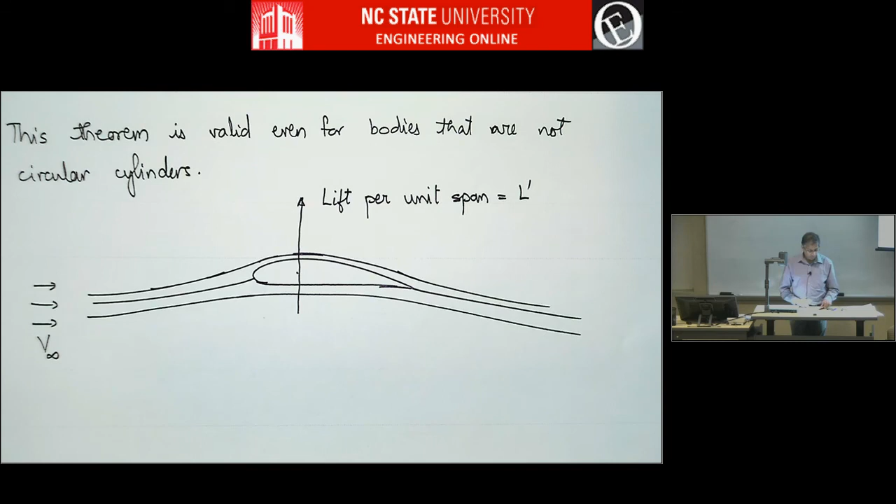So now if you draw a contour around this airfoil, and you calculate the circulation, let's say this is contour A. So circulation for contour A, we'll call that gamma A, is the integral around the closed contour A of V dot dl. That means you take this flow solution, go to lots of points, find V, and do V dot dl, dl going this way, and do that integration, you'll get gamma A.

Now it will turn out that the lift L prime will be rho V infinity gamma A. So this Kutta-Joukowski theorem works even for airfoils. We said rho V cross gamma, and V and gamma are perpendicular, so it's just rho V gamma. That works even for an airfoil.

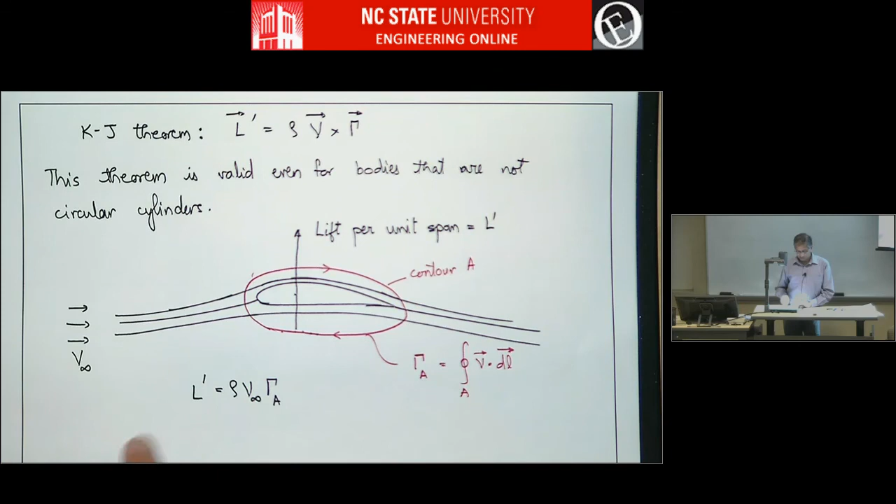On the other hand, if you take the full flow solution and take a contour here, let's say this is contour B, and you do rho V gamma for this, this will be gamma B equals 0, because it doesn't envelop a lift producing body.

That means if you take a contour around some object and measure the circulation, if that circulation is non-zero, that means the body inside is producing lift when exposed to V infinity. On the other hand, if you take a general contour with nothing inside, no body, nothing creating lift, no vortex inside, then that gamma will be 0.